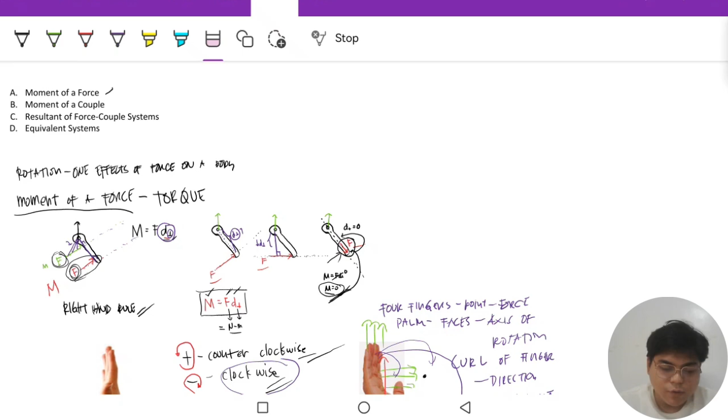For today's lesson, we will continue our previous lesson about moment of force. Our previous lesson was moment of force, so this time we will discuss moment of a couple. That's our discussion for today, let's go to moment of a couple.

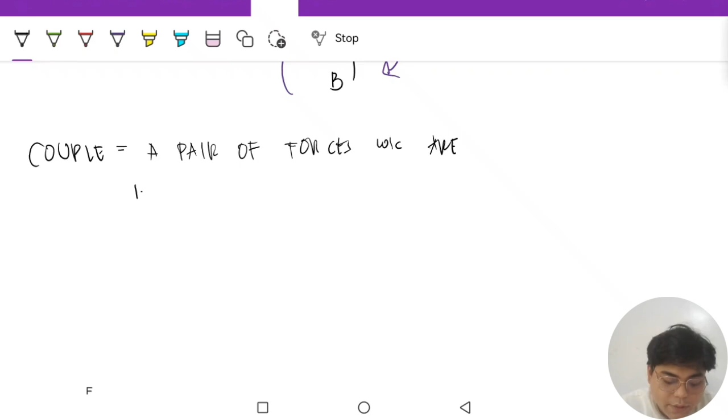First, let's define a couple. A couple is a pair of forces which are, number one, same magnitude, number two, parallel, and number three, opposite in direction.

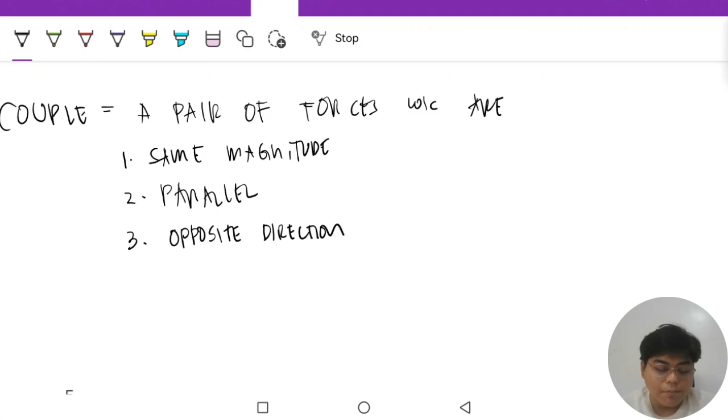For example, I have this body and there is a force here, let's say this is 30 newtons. And there's also a force here acting on the same body, also 30 newtons. The first force is vertically downward and the second force is vertically upward. Let's see if this pair satisfies all these conditions.

Number one is that they should have the same magnitude - both are 30 newtons, so first condition is check. Second condition, they should be parallel. Since these two are both vertical, one going down and one going up, we can say that they are also parallel with each other, so second condition is also a check.

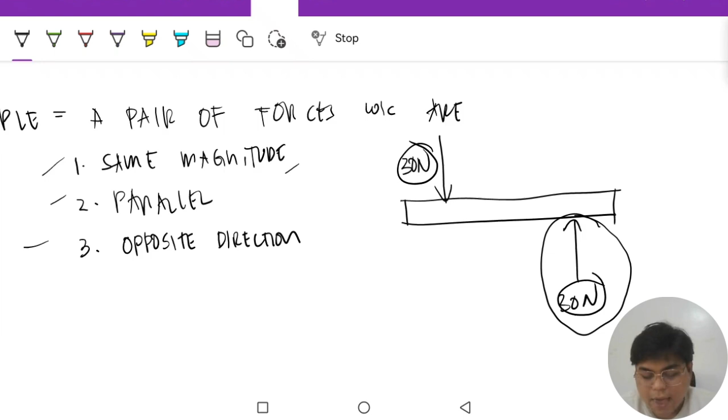Number three is they should have opposite directions - one is downward and one is upward. So this is an example of a force couple. That's it guys, simple lang naman kung ano yung meaning or definition natin ng couple.

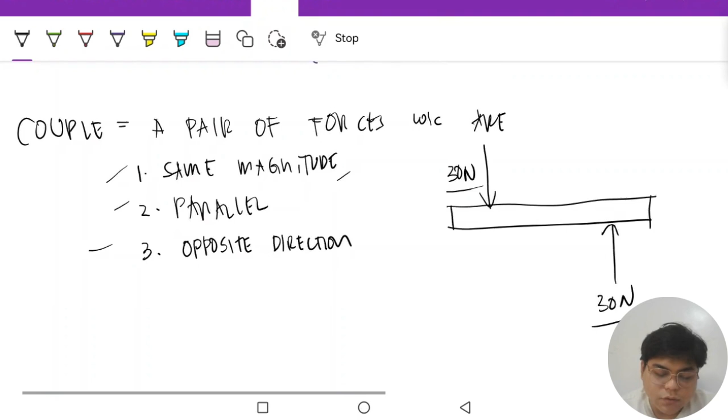Now, let's discuss couple moment or moment produced by this couple. If you recall, our previous lesson discussed moment of a force.

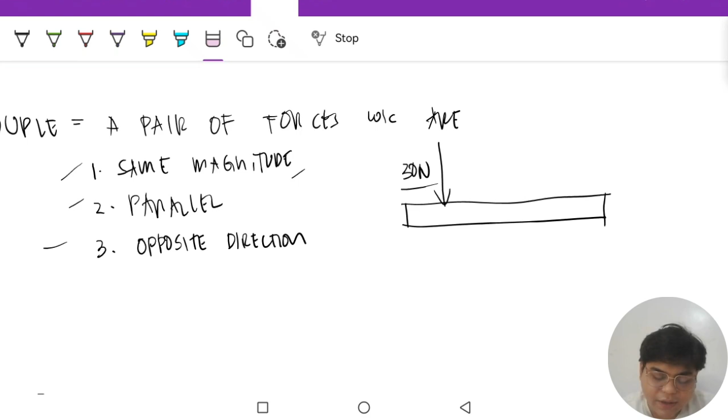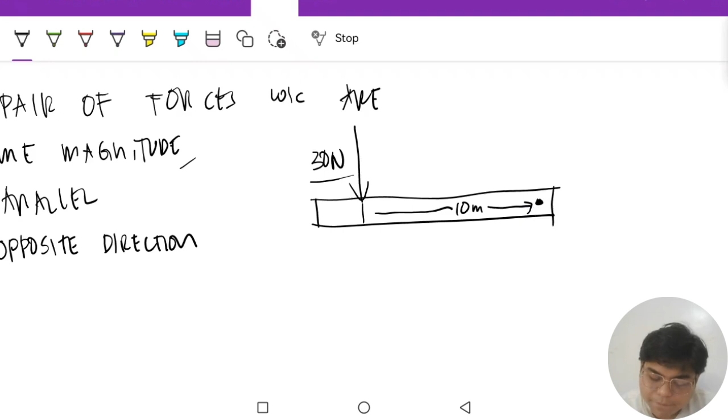For example, let's say we have that force and we have this point, and the distance between those two points is 10 meters. If you recall, to calculate the moment of this force, the moment is just F times D perpendicular. So if this is our point of reference, the moment due to the force is 30 newtons times 10 meters.

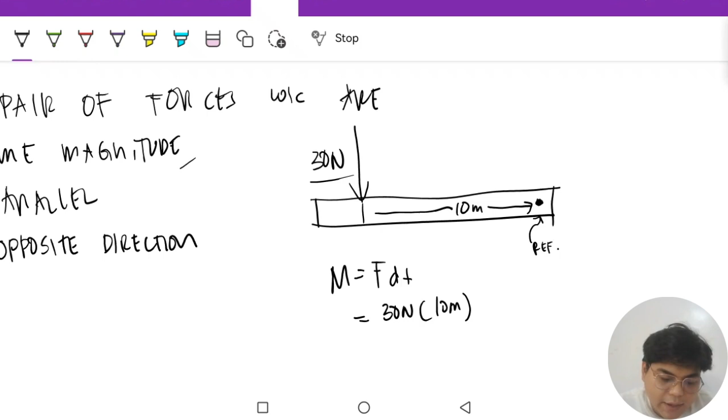This force will cause the body to rotate - if you are pinned here, the body will rotate in this direction, which is counterclockwise, so therefore this is a positive moment. The answer here is 300 Newton meter, that's the moment caused by this force.

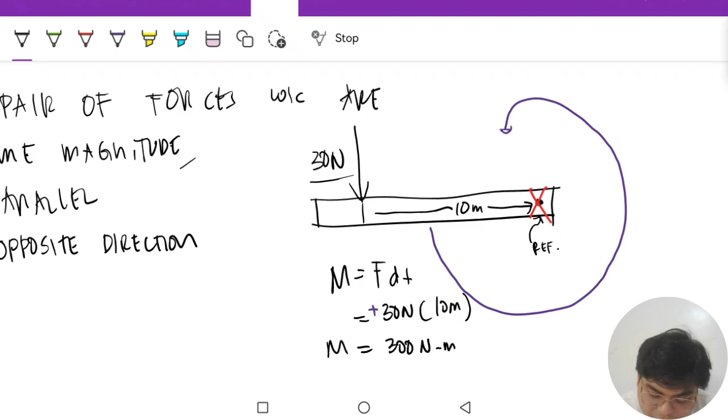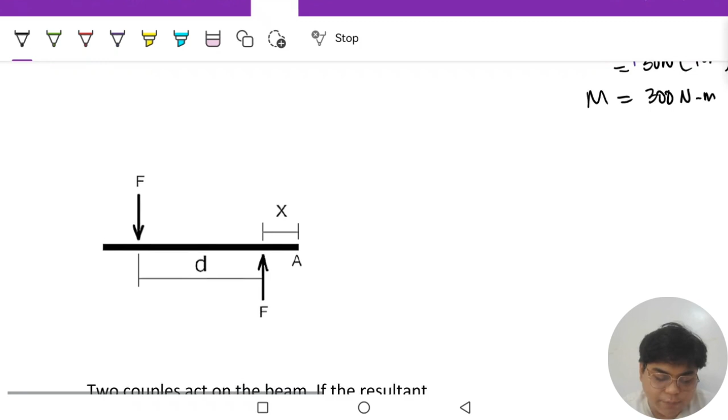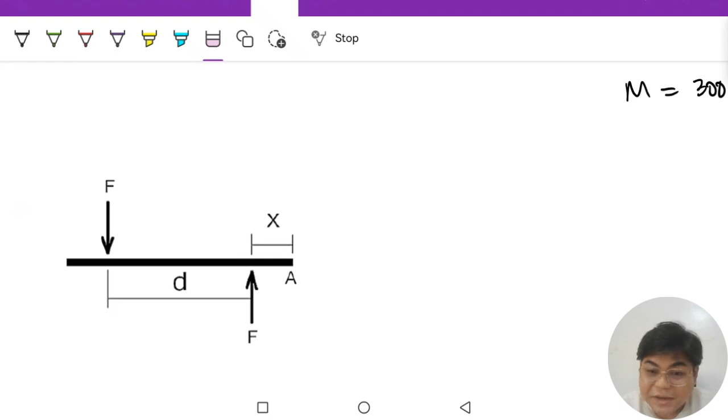Now since we're discussing couple moment, let's look at this example. Let's say we have a couple force, which are these two, and they are separated by a distance D. We also have this distance X from reference point A, or the end of this beam or stick. Let's try and calculate the moment of these two couples.

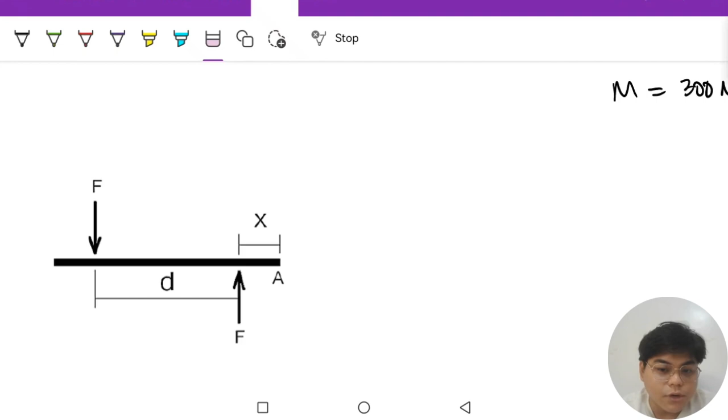To compute the moment of the couple, let's compute the moment of the two forces separately. Let's compute the moment felt at point A first. The moment due to that force will be force F times the distance. The distance of this force up to A is D plus X - this is D and this is X. To get the full distance, we just have to add those two.

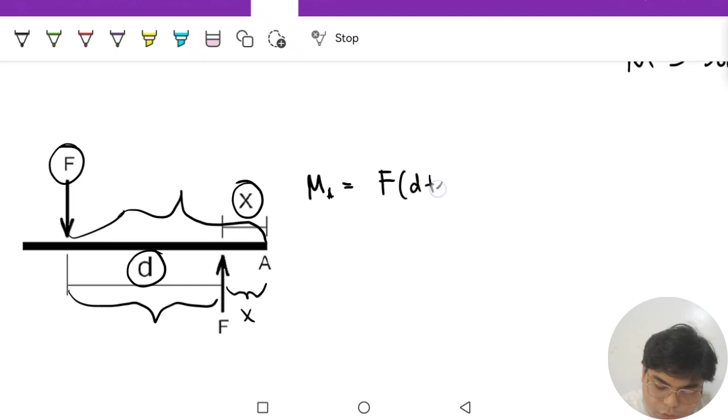So the question is, is this positive or negative? This force will cause this body to rotate, if we are referencing at A, if we're pinned here, this force will cause the body to rotate in that direction - that is counterclockwise, so therefore that is a positive moment.

For the second force, let's calculate. The moment due to that force will be F, the magnitude, times the distance from A, which is just X here. So the question is, what will be the direction of the moment caused by that force? Again, if this is our reference point A, this force will cause the body to rotate in this direction, clockwise, so therefore this is negative.

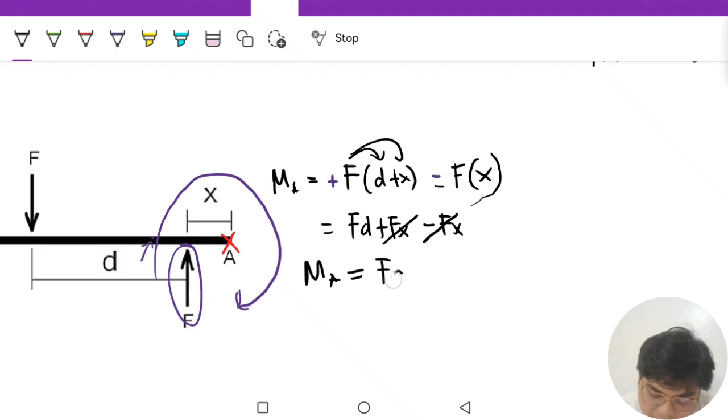Let's compute: this becomes F times D plus F times X - we just distribute the F - then minus F times X. So these two cancel out, and what remains is the moment at point A will be just F times D. So as you can notice guys, it doesn't matter, the distance X did not become a factor. So the effect of this couple of forces, this pair of forces, is just F times D - that's the moment at point A.

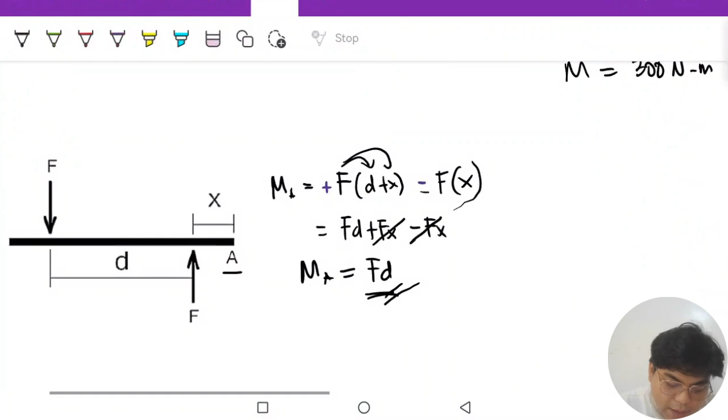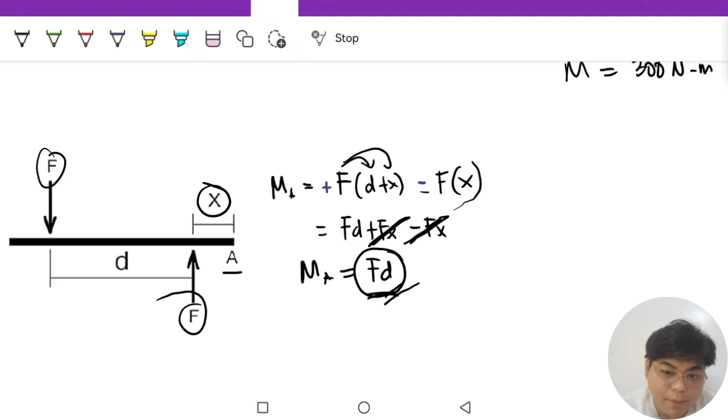Regardless guys, kung nasaan itong force na to, with respect to point A, kahit ano tong distance X na yan, it doesn't matter, kasi nakita natin that they just canceled. Ang natira is yung magnitude ng force, whatever that magnitude may be, times the distance between the two couple forces.

So that's how we calculate the moment of a couple. Mabuti pa yung couple, may moment. Okay, so simple lang guys.

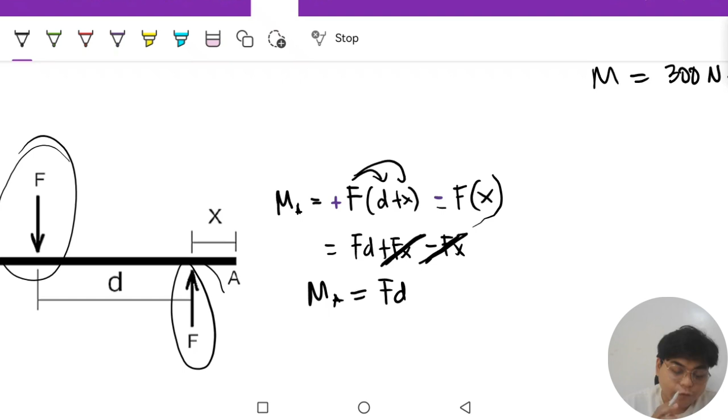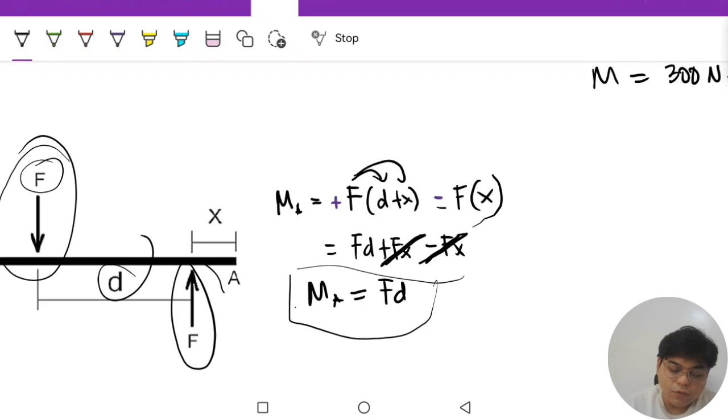Again, to calculate, if given tayo ng couple, which are two forces which have the same magnitude, which are parallel and are of opposite directions, we can calculate the effect of that pair of forces to a body using this equation. Kailangan lang natin yung force and the distance between those two forces, and makuha na natin yung kanyang moment at point A.

Okay, so let's make an example. Two couples act on the beam. If the resultant couple is to be 0, determine the magnitudes of P and F and the distance between A and B. Okay, so look at this example.

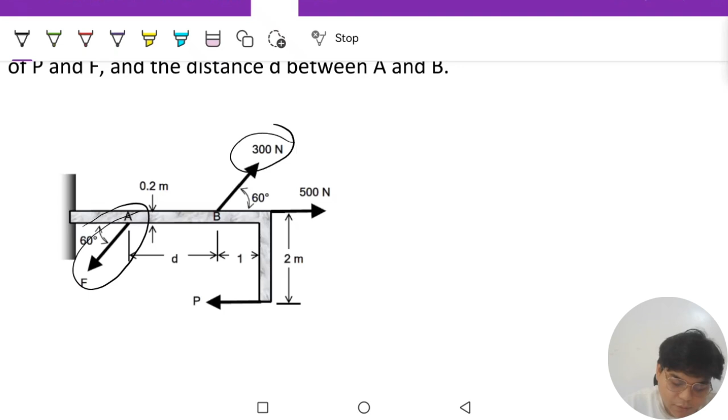Sabi, this kung ano man tong structure na to, that is a bakal structure, and meron tayong forces, ito, and ito, and ito, and ito. May apat tayo na forces nag-act dyan sa structure na yan. So ang tinatanong, what will be this force F and this force P.

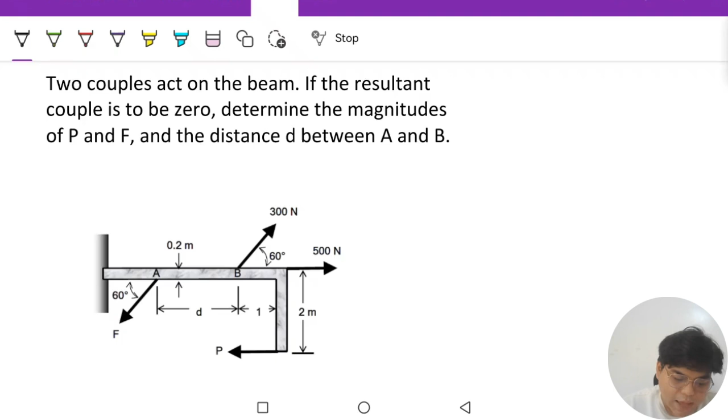At the distance between A and B, itong distance na to will be. Okay, so let's do it. So P and F, masasagutan na agad natin to. Bakit? Given naman sa problem, two couples or may dalawa tayong pares. And for a couple to be a couple, anong ulit yung unang condition?

They should be parallel and the first condition is that they should be of the same magnitude. And the second is they should be parallel. And the third is they should be of the opposite direction. Okay, so hanapin natin dito yung dalawang pares.

Okay, so una, halata naman kung alin dyan yung magkapares kasi sila yung parallel. So ito, kitang-kita, they are parallel, they are of the opposite direction, and ang kulang na lang is they should be of the same magnitude. Okay, so if this is 500 newtons, then therefore P should be also 500 newtons. Basic, so nasagutan na natin to.

Then let's do it for the second pair. So ito naman, they look parallel and they are in fact parallel kasi with respect to the horizontal, to a horizontal line, it is 60 degrees. At the same time, ito rin, they are 60 degrees with respect to the horizontal. So they are parallel.

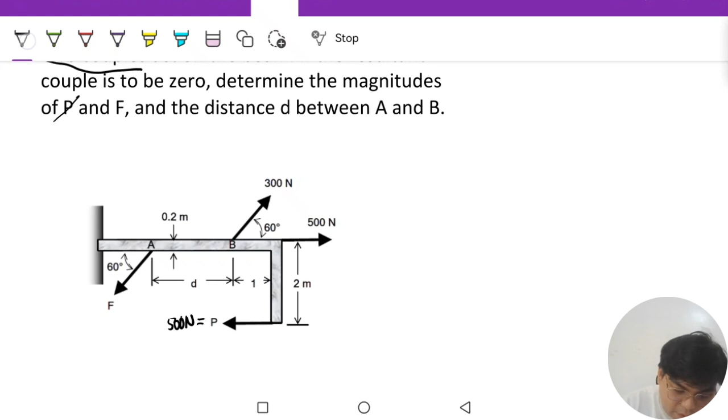Pangalawa, they are of the opposite direction. And lastly, they should have the same magnitude. So if this is 300 newtons, then therefore this should also be 300 newtons. Okay, so nakuha na natin si P and si F. Ganun lang ka dali, so let's calculate naman yung distance between A and B.

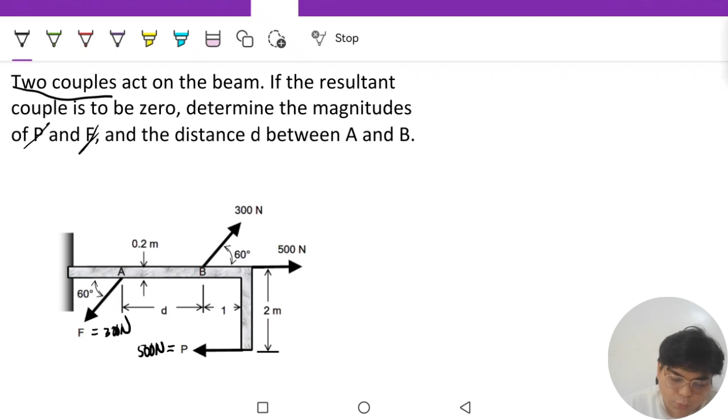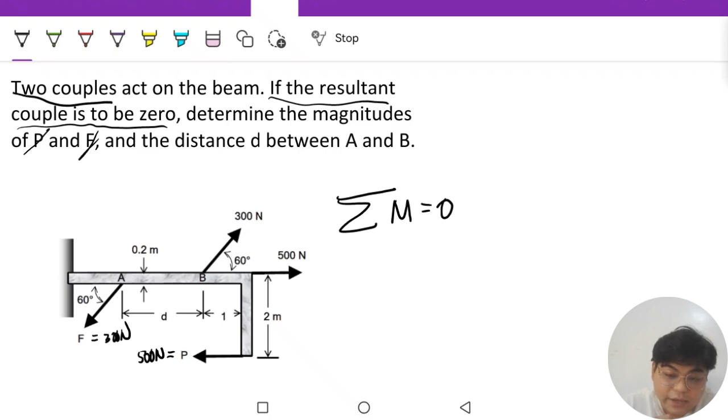So ang sinasabi dito, if the resultant couple is to be zero, ibig sabihin kapag sinama natin yung dalawang moments ng dalawang couple, they should be equivalent to zero. Okay, so summation ng moment should be equal to zero, iyan ang nakalagay sa given. And to get the summation ng moments, pwede natin kunin yung moment ng couple dito and ipag-add natin sila.

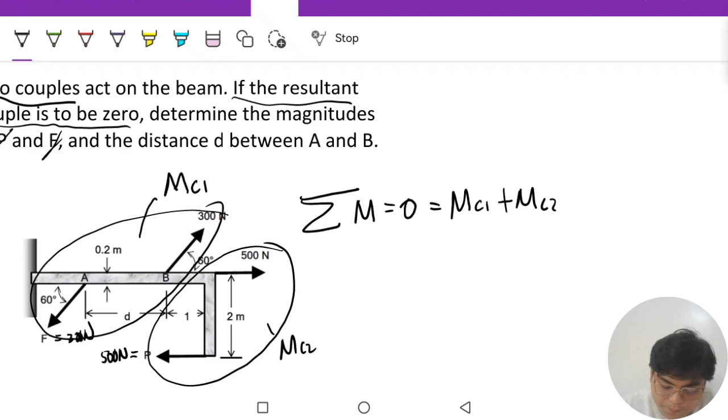Okay, so I'll name this moment couple 1 or couple moment 1, and this as MC2. So MC1 plus MC2, this should be equal to 0. Okay, so let's calculate MC1 and MC2. MC2 muna kasi mas madali siya, ito, mas madali tignan.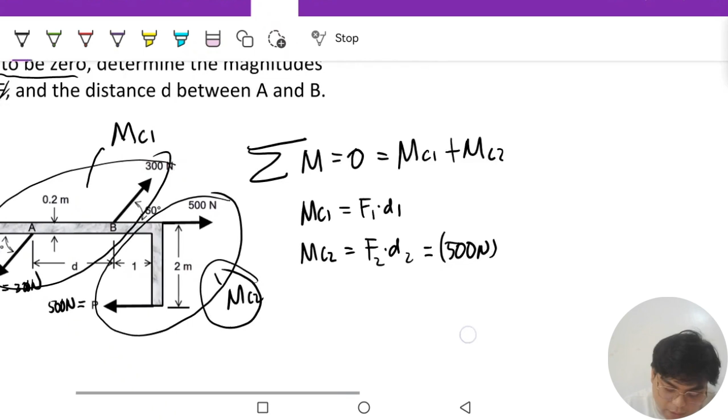Ang equation natin for MC, for couple moment, that is just F times D, or F2 times D2, and this is F1 times D1. Kaya ang F2 natin is 500 newtons and the distance between is 2 meters. Okay, so ang F1 naman, that is 300 newtons.

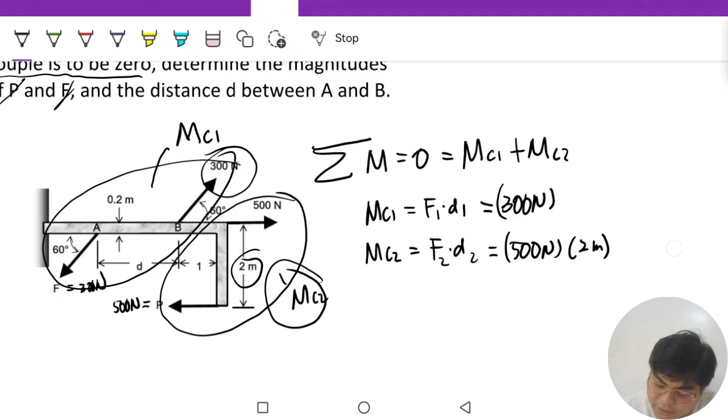And the distance between them is, well, hindi pa given, so that is D1. Okay, so first, let us also determine the direction of these moments. Itong dalawa muna, this moment first. Okay, kung mapapansin nyo ay i-connect nyo lang yung dalawang arrows para malaman nyo yung direction ng moment.

So kung i-connect ko yan papunta dito at ito papunta dito, so yung arrow ko is pag ganun ano, pag ganun yung rotation. So that is clockwise and therefore this MC2 is negative. Okay, so MC2 is, ito ay dapat negative yan.

Okay, so how about ito naman? So idugtong natin, ano? Papunta siya doon. And ito papunta dito. Okay, so ang rotation niya is pag ganyan. Okay, and that is counterclockwise and therefore this is positive. Okay, so input natin yan doon.

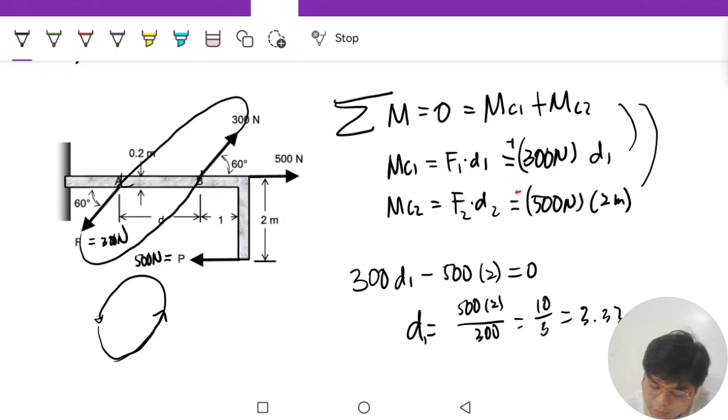So MC1 is 300 D1 and minus 500 times 2 meters. Okay, so therefore this is equal to 0, and D1 will be equal to 500 times 2 over 300, or that is 10 over 3, or that is 3.33333. Okay, so that is D1.

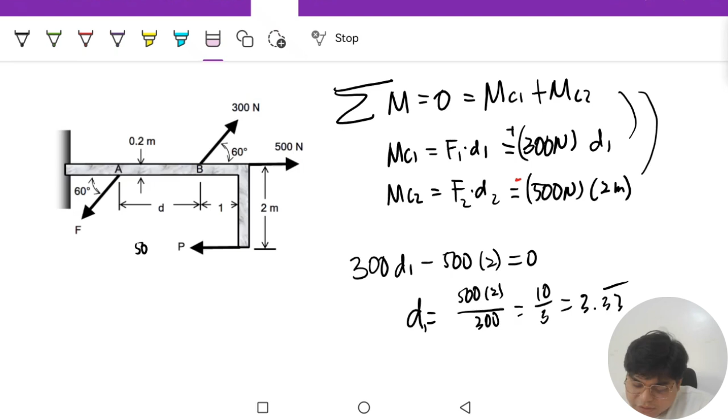Okay, is that already the answer? Yan lang yung distance between these two forces, 300 newtons. Okay, hindi pa yan guys, itong D na to. Okay, so let me explain why. Let me redraw these two forces.

So we have this force, and drawing ko muna tuloy yung bar. Okay, so the bar is something like this. Let's name this dulo as point A and this is point B. Okay, so ayan, so kung mapapansin nyo, yung force ay nasa taas dito. This is 300 newtons and the angle is 60 degrees. Dito naman, nasa baba siya na side.

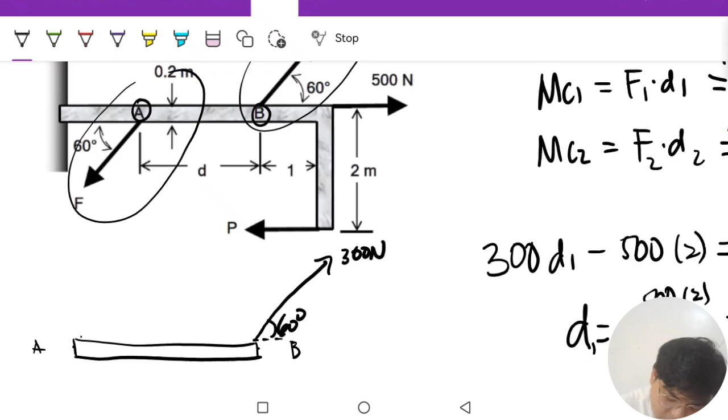So, this is 300 newtons as well. And this angle is 60 degrees.

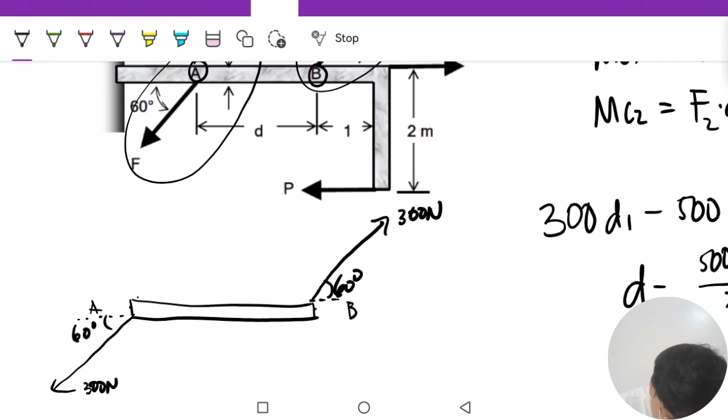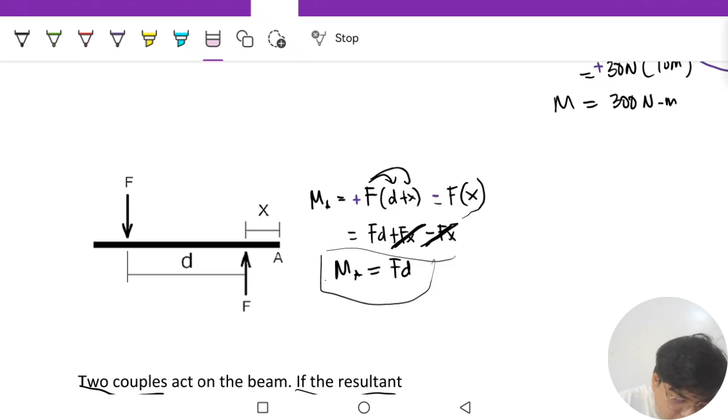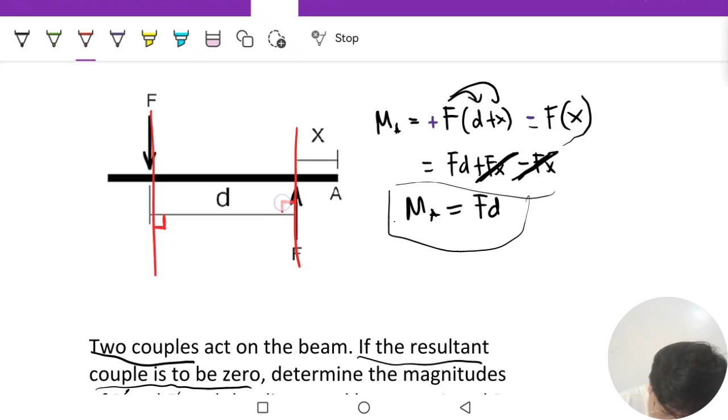Okay, so I extend the line of action. Now, this computed distance, guys, if you notice, from our earlier example, it is the nearest distance or perpendicular distance between the two when they are standing. Connecting the two lines of action using a perpendicular line, that is the distance D.

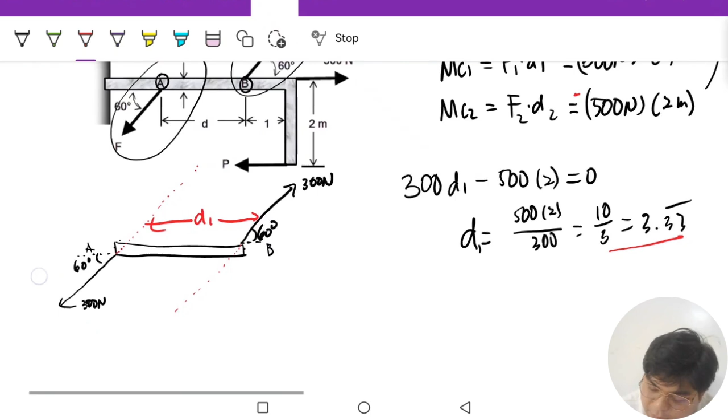Okay, so now, if they are lying down, this is not the D we computed earlier. That is not D1. Why? Because D1, guys, it should be the perpendicular distance between the two lines of action.

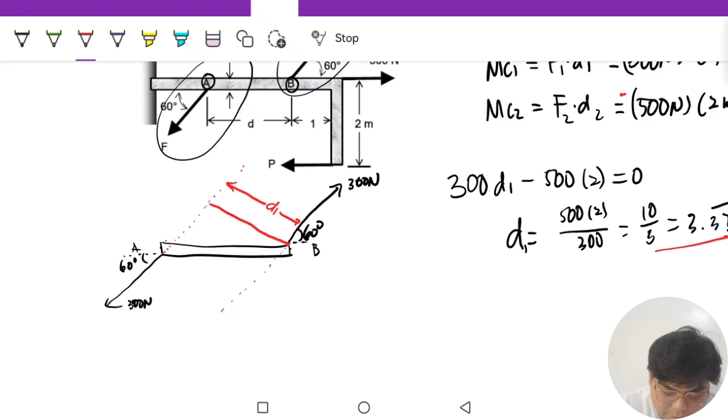Okay, so that is distance D1. So let us draw from this point at the end, at that corner, going there. That will be my D1. Let me zoom in.

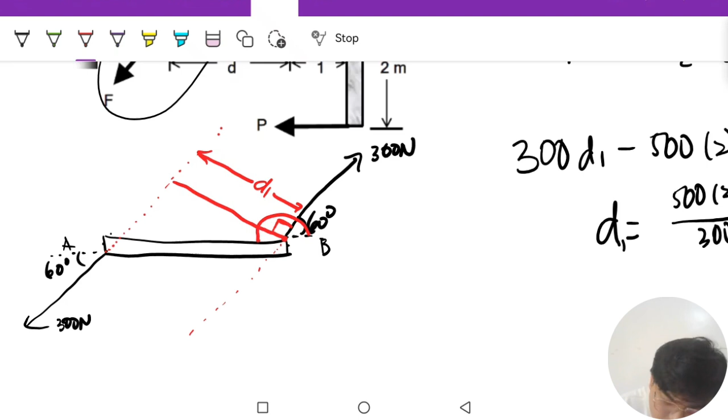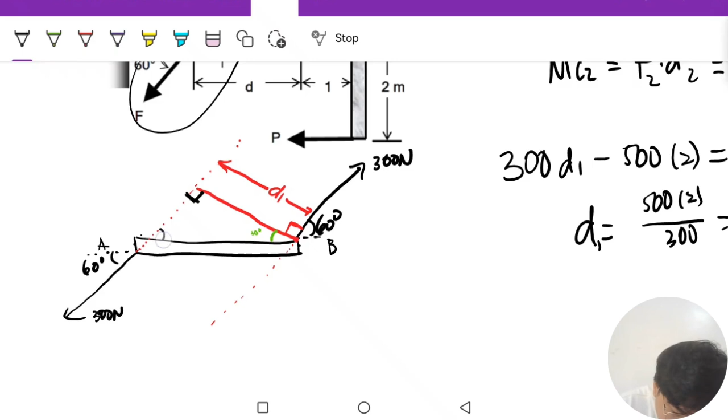If that is 60 and this is 90 degrees because it's perpendicular, so that is 90 plus 60, that is 150. And we know that this whole angle should be 180. So therefore, I can say that this angle is 30 degrees. And since that is 30, and we know that this is also perpendicular, so this is 90, and therefore this is 60 degrees.

Right now, I have a right triangle and I have one side which is D1. We know this. This is equal to 10 over 3. And we have the sides and angles of the right triangle, so we can now compute this distance.

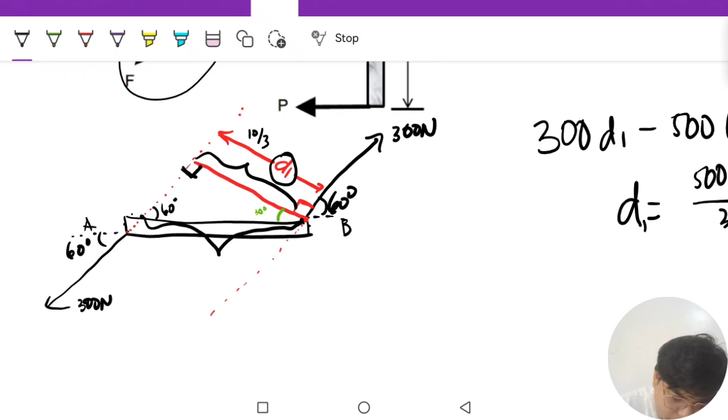Okay, so from this point going to this point, I'll redraw this and add color coding to the sides so you can see it better. So this is the red side, this is the violet side, and this is the green. Between the green and the violet, that is 60 degrees. This is 90 and this is 30. And also the red, this is 10 over 3.

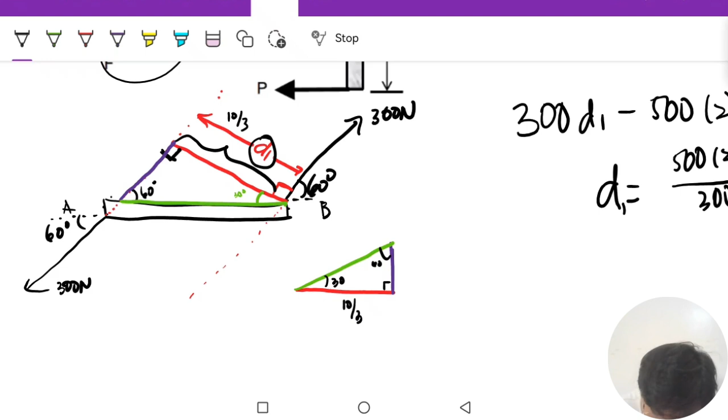Okay, so what we're looking for is this green side. Let's use the Pythagorean theorem. We can get this by using cosine theta, or cosine of 30, times the hypotenuse. Let's name this H. So H cosine 30 will give me this red side, which is 10 over 3. Using the calculator, 10 over 3 divided by cosine 30, this gives me H equal to, this is 20 square root of 3 over 9, or approximately 3.849 meters. So is that the final answer?

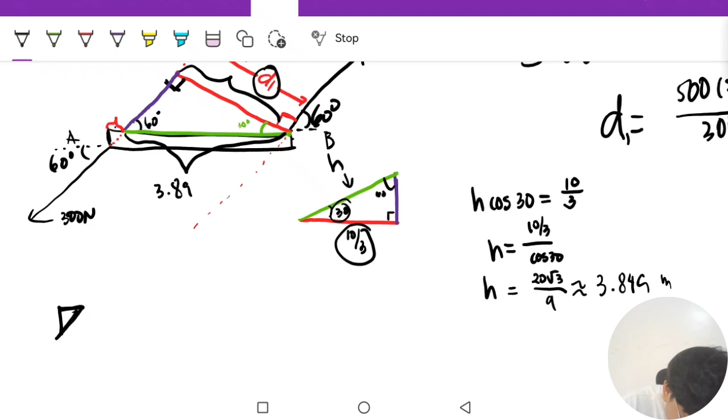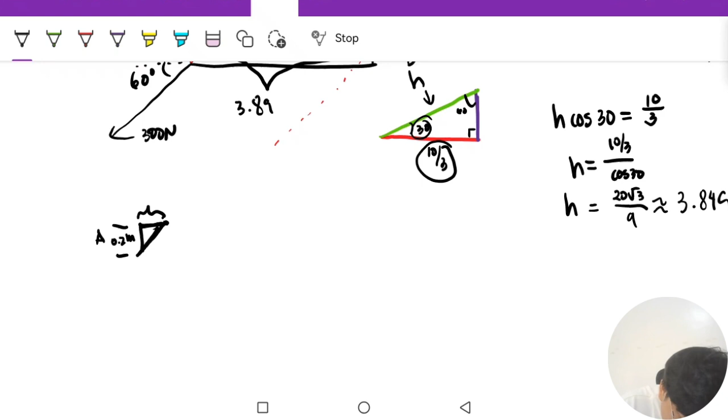Okay, so what do we know? The thickness of this is 0.2 meters. Let's say this is 0.2 meters and this is 90 degrees. Sorry guys, let me enlarge it so it's easier. So this is 0.2 meters, and if you notice, that is 60 degrees. So therefore that is also 60, so this is also 60 degrees. So this is 60, this is 90, and this is also 30.

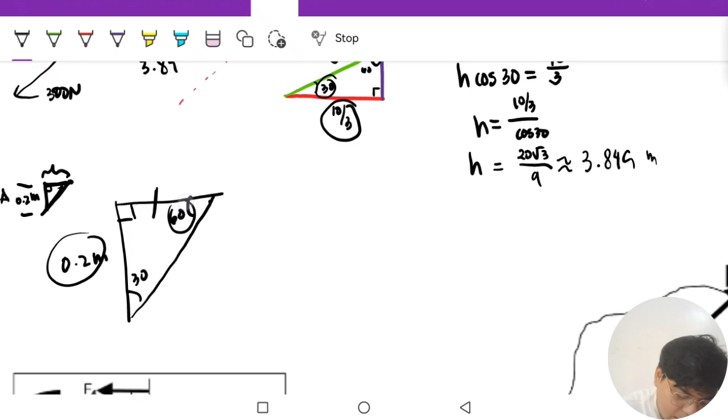Okay, so we need to find this side. So we can use the sine law, because we know one side and we know the angles. It's just 0.2 over sine of the opposite angle, which is 60. This is equal to this side. Let's name this x. So that is equal to x over sine 30, or its opposite angle. So computing for x, we get sine 30 over sine 60 times 0.2, or that is equal to the square root of 3 over 15, or approximately 0.11547, 00538.

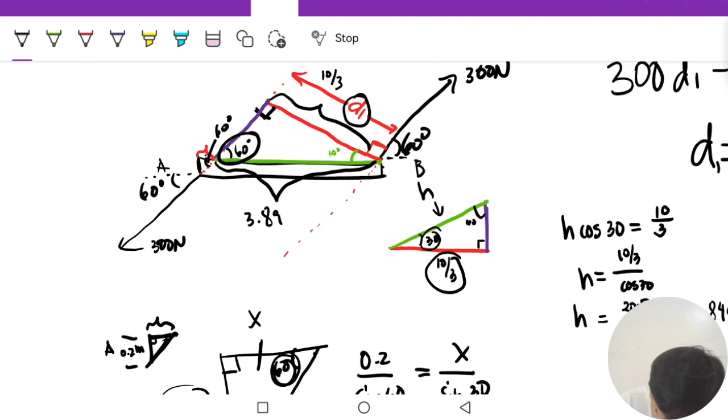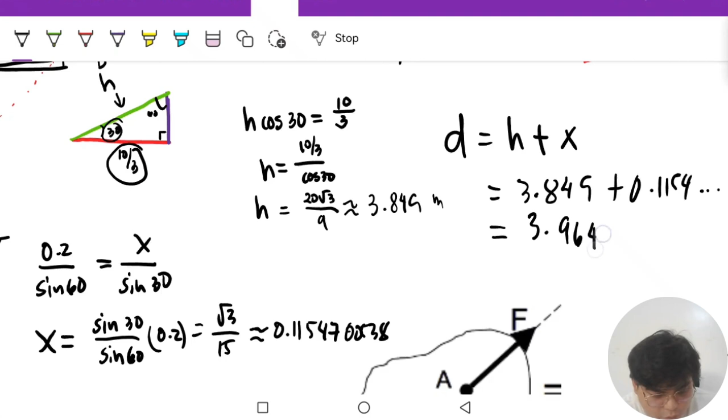Okay, so now we got this green side and this small part. So that is D, right? What we're looking for is D, and that is equal to D1 that we computed earlier — sorry, not D1, H. So D is equal to H plus our X that we solved here. Okay, so that is 3.849 plus 0.1154, so that is equal to 3.96447, 1848 meters. Okay, so this is the answer to the problem.

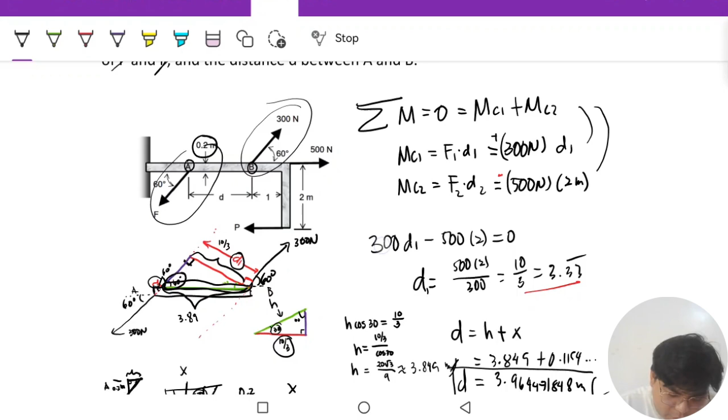Okay, so we got the answer, the distance between these two, by knowing the relationship between the moments of these two couples. Okay, and I think that will be all for this video. That's it for now, we'll stop here on couple moments.